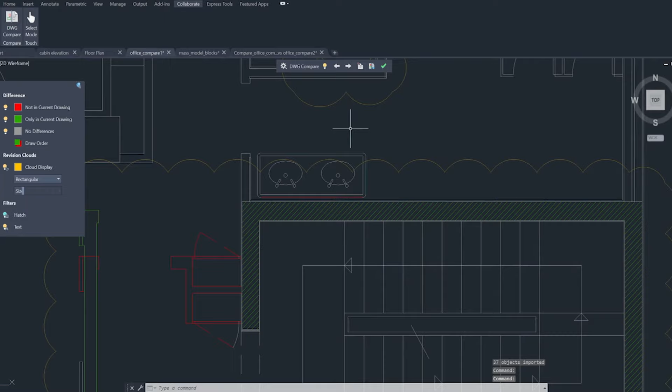When we speak of extraction, AutoCAD is a major benefit here. Data extraction using AutoCAD gives you the major advantage of extracting data in Excel file formats. It's not just Excel format, it gets integrated within the drawing, providing block and attribute data. AutoCAD lists down all the data changes that can be extracted, either into an AutoCAD table or into a Microsoft Excel .xls file.

Design center lets you access content that we are utilizing in a repeated designing process. You can easily create a tool palette within your design center to access your content without any data loss. You can also use design center to import almost any content from other drawings, such as styles, layouts, xrefs, and much more.

It's one of the bigger advantages packed into a smaller icon, we can say. Most importantly, it helps you drill down to the content you want for any specific need. Using the design center often can actually improve your efficiency in adding content to your drawing or attaching extra files.

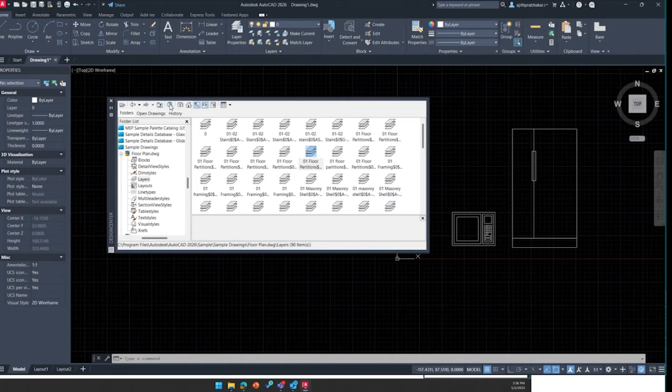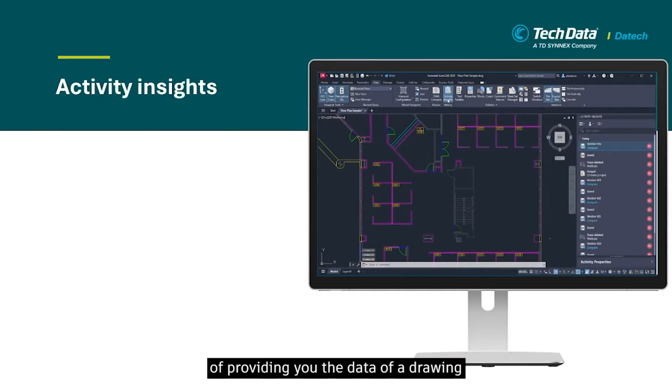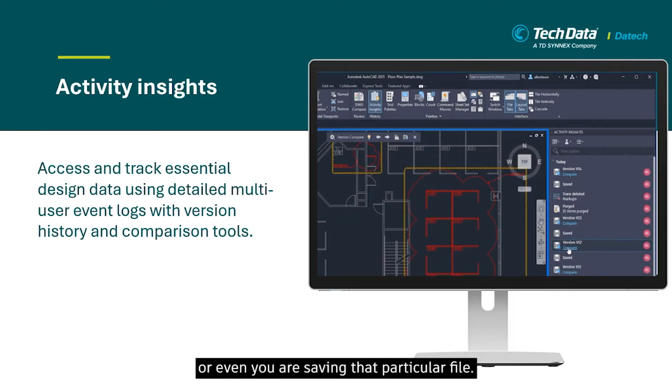Activity Insights is a major advantage, providing you data of a drawing that has been accessed not only inside AutoCAD but also outside. So if there are any changes, such as renaming your file or using powerful commands like purge or audit, or even saving that particular file, AutoCAD Activity Insights will give you insight into your entire drawing.

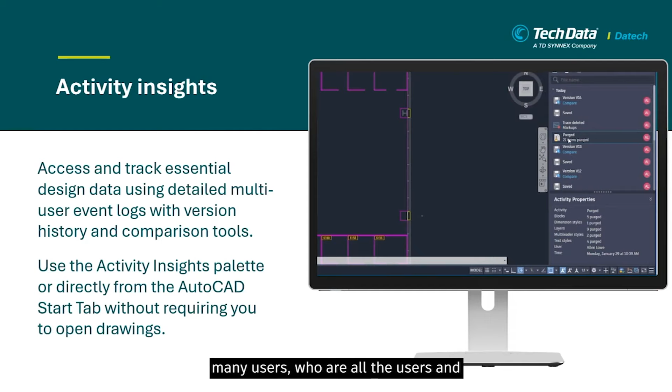This new advantage in AutoCAD 2026 gives you a detailed output of all the corrections made respective to your file size, and most effectively it's already available directly in the start tab. It gives a clear idea of what changes are being made, over what period of time, and by how many users and who they are. Most effectively, you can find it as a revision cloud, and you can bring that data back into live action.

AutoLISP provides thousands of pre-drawn or pre-written programs already created on the basis of AutoCAD. So if you are working on common data, any repeated task, or different data, AutoLISP is a potential software program that helps you create and run multiple instances in a short period of time.

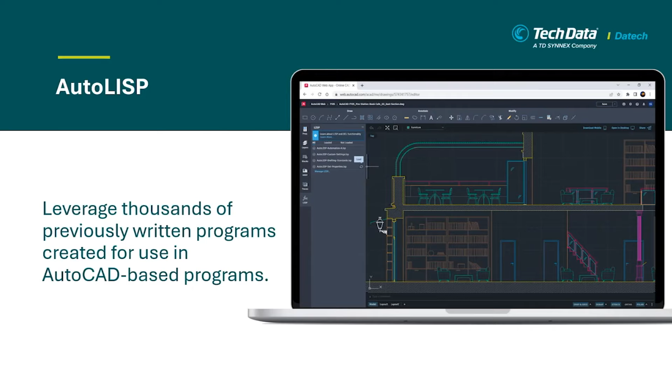AutoCAD provides you with thousands of pre-written programs that are built into AutoCAD for you to access.

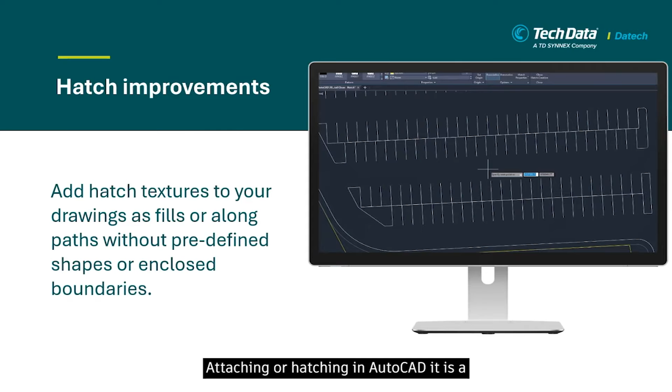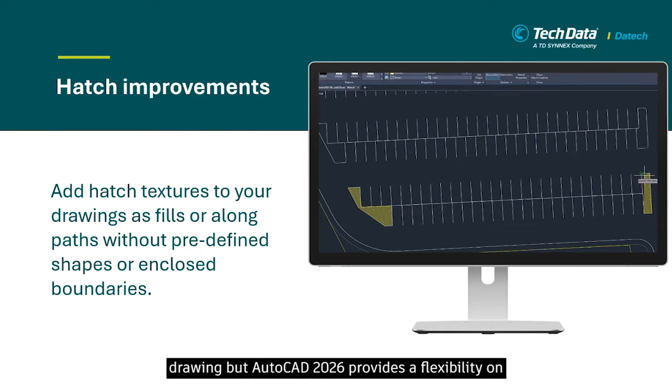Hatches is one of the beautiful commands I personally love the most, because creating hatches could need multiple pre-drawn shapes earlier, but hatching in 2026 has been improved to a greater extent. Hatching in AutoCAD is a fundamental method of highlighting and accelerating the data of an object in an area of a drawing. AutoCAD 2026 provides flexibility on when hatches could be included in a path.

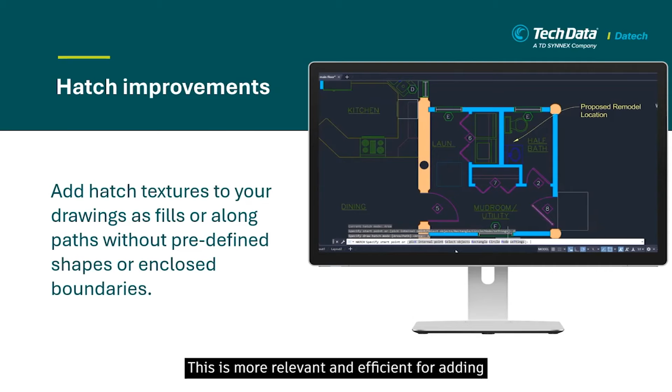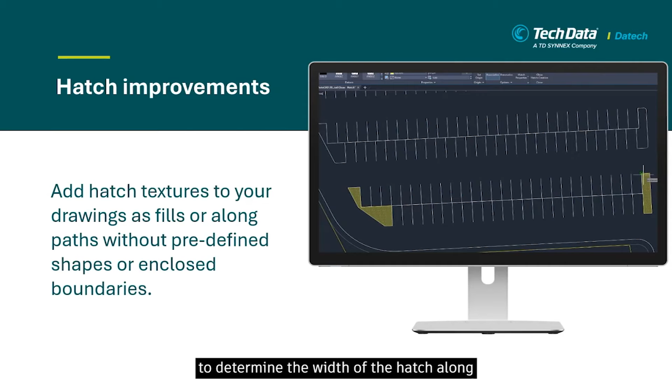Earlier, in 2021 if I'm not wrong, this task was a normal requirement - you just need to offset from a defined path, and we had to need the boundaries for providing the hatches. Now all this data is no longer required. This is more relevant and efficient for adding new paths or hatches, since hatches without any predefined boundaries can now be created more effectively, including hatches used in the offset command to determine the width of the hatch along the area, or along additional lines and polylines enclosed in boundaries. They are more potential and effective by utilizing the current version of AutoCAD hatches.

AutoCAD, as we said, has become one software solution for multiple industries. This particular toolset gives you an ability to work around, or gives satisfaction in bringing multiple solutions to a single platform. By utilizing the toolset features - there are, say for example, 7 different toolsets available on a single purchase - that is one of the major benefits, where you can work on the efficiency of multiple industry softwares in a single platform. AutoCAD toolset is one of the major benefits for multiple industries.

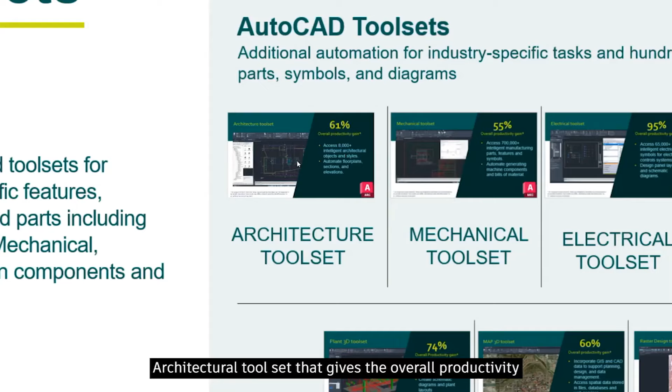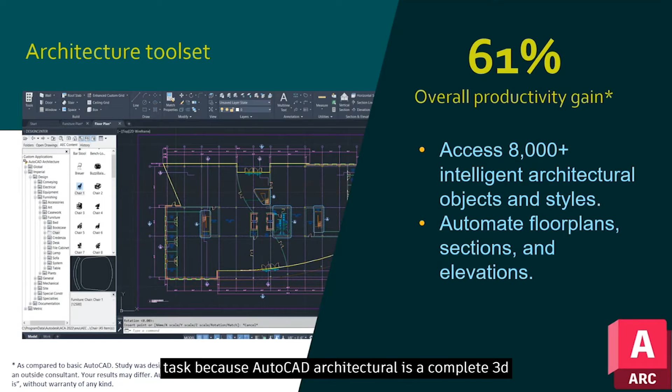Now let me take you across various toolset features, starting with architecture. The architectural toolset gives an overall productivity of around 61%. This particular toolset gives you access to around 8,000 plus intelligent architectural symbol libraries. They are more effective because every designer in terms of architects needs these specific architectural objects. They have more intelligent features that have been enabled, and automate your floor plans, section plans, and elevations. This process of automation in your design process is no longer a tedious task, because AutoCAD architecture is a complete 3D solution for your designs.

Mechanical toolset - when we are in the manufacturing industry, we utilized AutoCAD in the beginning, right? So we have seen how fast or efficient our older AutoCAD were. Now we can give you a bigger solution here by utilizing the mechanical toolset. It is more potential, giving you access to around 7 lakh library items, such as parts, features, and symbols. These are different categories: parts include your fasteners, features include types of nuts or threads we utilize, the slots we create - there are different features we create based on standards, based on the needs for your designs. And the last one is symbols - they are again a potential for the designers.

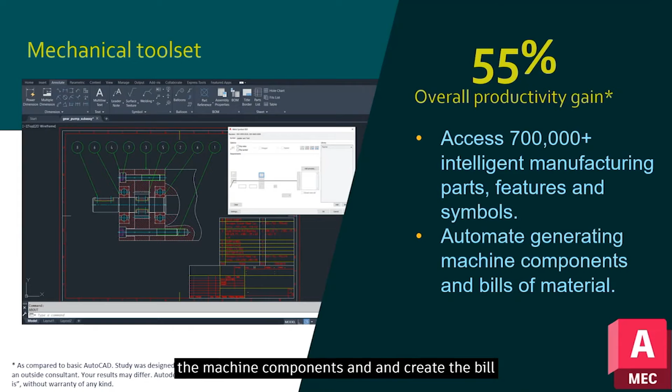Here in AutoCAD mechanical toolset, it is a complete 2D, but an automated 2D manner. We can find solutions that have been improved in the path of creating the drawings, and most effectively we can find AutoCAD is improving to a greater level of designing transactions by utilizing the AutoCAD mechanical toolset. It helps you auto-generate machine components and create the bill of materials in a much faster and more efficient manner.

Electrical toolset - this covers industries working on creating control panel designs, schematics and control panels; this is a perfect solution for you. AutoCAD electrical toolset gives access to around 65,000 intelligent libraries. These libraries are categorized based on the manufacturers - electrical designers might be utilizing Siemens, ABB, or Eaton, whichever manufacturer is common around the market you are utilizing. We can find those symbols of electrical components available for you to access.

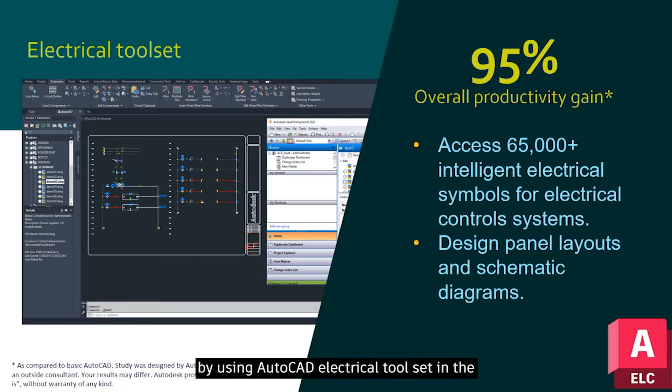The design for a control panel is synchronized directly from the schematics. So if there are any changes created in the schematics, that gets reflected in the control panel by using AutoCAD electrical toolset. So that saves your time to the next level.

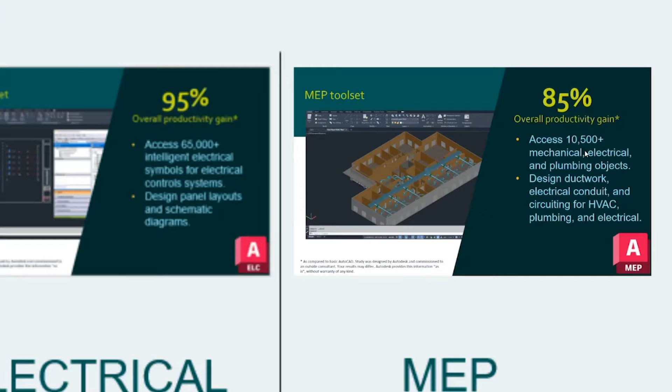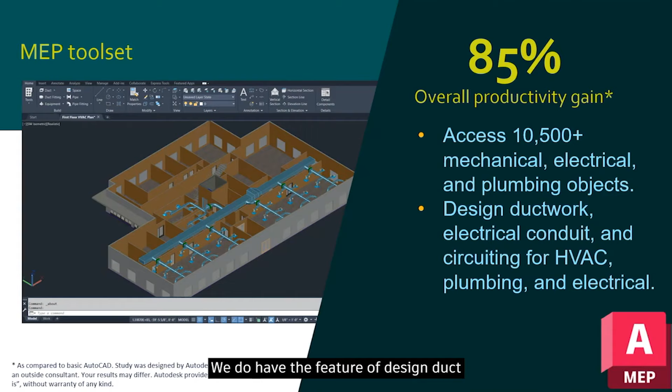MEP toolset - MEP is a combination of mechanical, electrical, plumbing, where you will be able to improve your efficiency to around 85%. Here, all designers can access around 10,000 plus mechanical, electrical, and plumbing objects that are predefined and available for MEP users. One major advantage of utilizing MEP is the collision detection option, which helps give a detailed report on what items have been getting collided in your drawings, and provides an update on all the data. We do have the feature of design duct and electrical conduit, even creating your HVAC designs for your drawings.

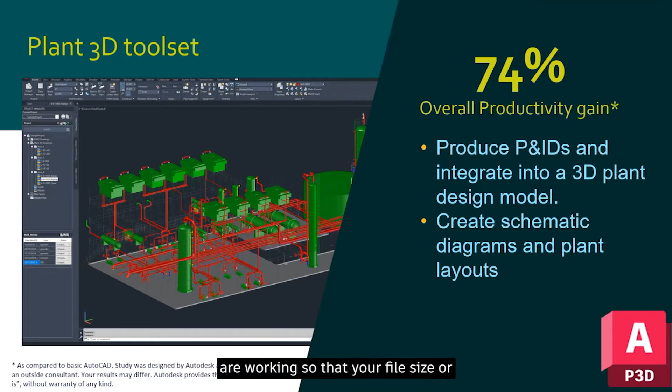Plant 3D toolset is an overall potential tool where you'll be able to create your P&ID and your 3D model. So if you're working on any P&ID design or pipeline designs, we are here to give the best solution for you. In AutoCAD Plant 3D, you can create a P&ID that gets integrated with your 3D model. Apart from that, we provide the benefit of converting your entire 3D model into isometric or orthographic drawings that have been created on the back end, not while you're working, so that your file size or your system doesn't get hung up during your designs.

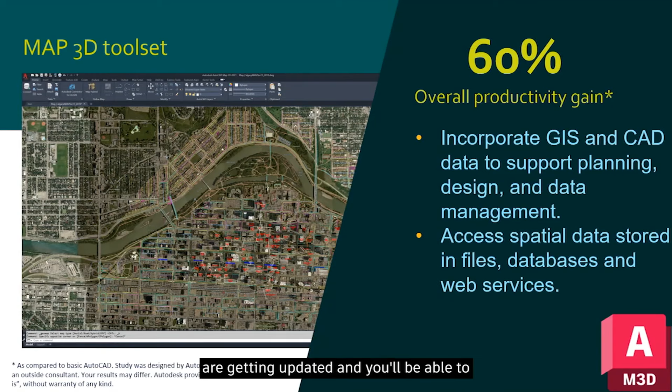There's a bigger advantage of utilizing the FDOs, feature data objects, where you can find the drawings are getting reflected, and also the GIS data are getting converted. The beautiful part of using Map 3D is that the FDOs recognize the layers in your drawing. It helps you recognize the list of layers with respect to roads, buildings, parks, anything we create in our design. You'll be able to find those layers getting updated, and track those layers for your designs. More effective, right?

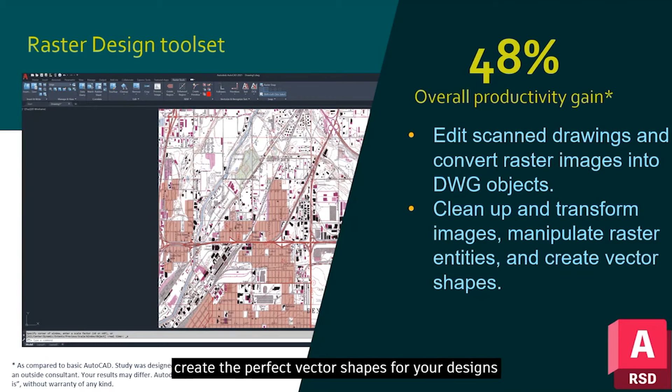When a designer is working to convert image drawings, or trying to set up polylines, they might end up with a feature that they cannot scale, cannot add dimensions to, cannot add annotations to. But by utilizing the raster design toolset, that is a best-in-class software that helps you edit scan drawings, convert raster images, and multiple entities into drawing objects. It helps you clean up your entire image, manipulate raster entities, and create the perfect vector shapes for your designs.

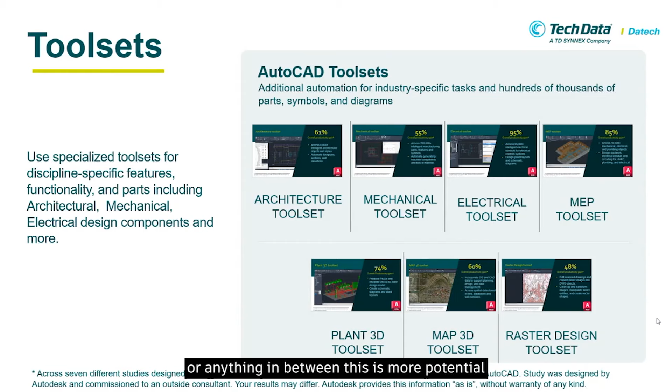Overall, by utilizing the AutoCAD specialized toolset, you'll be able to access all seven softwares as a single bundle. If you are into architectural toolset, you can make use of MEP and also raster design toolset to improve your efficiency. If you are into mechanical toolset, you can make use of the mechanical industry toolset, Plant 3D toolset, and raster design toolset. So definitely, it is a combined solution for all industries, whether you are into architecture, manufacturing, or anything in between. This has more potential where you'll be able to save a lot of time for your designs.

When we say community benefits, there are multiple benefits when you purchase a software. It is not just that we provide the software, it is more than that. We are providing a bigger relationship with our customers, supporting them to experience additional support from the Autodesk team that they provide across the globe.

This community could also help you decrease your IT workload by engaging with our experts who are more knowledgeable, and they are working 24 by 7, which is also supported in 12 different languages, including Portuguese, Spanish, and much more.

Connect. In terms of connecting, building your network by getting involved in the Autodesk community is what we expect a lot. Meeting your peers who are joining the discussions and learning more out of the topic, leading to collaboration, and also the trending new objects or features that help you upscale your opportunities.

Growing and learning in terms of community, and expertise from experts and industry peers, is in demand for us. This cannot be taken online, it could be taken only through experience. So we are providing you that experience through Autodesk University, exploring free certifications and courses that help you support your soft skills and develop your professional reputation by sharing your knowledge in the Autodesk community.